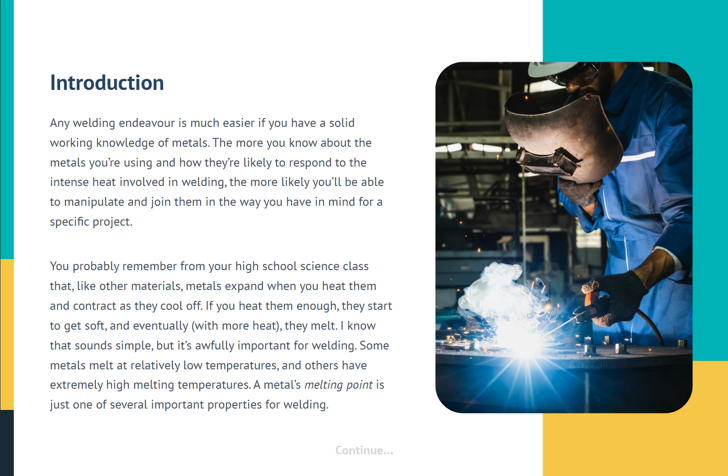Any welding endeavor is much easier if you have a solid working knowledge of metals. The more you know about the metals you're using and how they're likely to respond to the intense heat involved in welding, the more likely you'll be able to manipulate and join them in the way you have in mind for a specific project. You probably remember from high school science class that, like other materials, metals expand when you heat them and contract as they cool off. If you heat them enough, they start to get soft, and eventually, with more heat, they melt. I know that sounds simple, but it's awfully important for welding. Some metals melt at relatively low temperatures, and others have extremely high melting temperatures. A metal's melting point is just one of several important properties for welding.

Here are just a few others to consider. Ductility is a metal's ability to change shape, bend, stretch, and so on, without breaking. Gold has a high level of ductility, while tungsten isn't very ductile at all.

Electrical conductivity is a measure of how well a metal can conduct a current of electricity. Copper conducts electricity really well. By comparison, stainless steel isn't a great conductor of electricity.

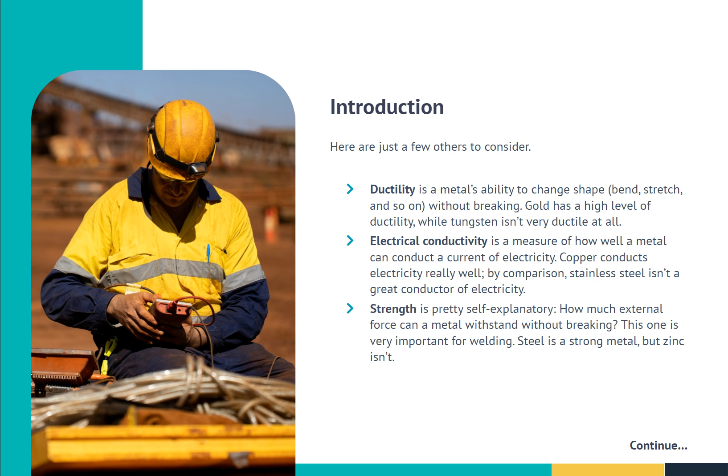Strength is pretty self-explanatory: how much external force can a metal withstand without breaking? This one is very important for welding. Steel is a strong metal, but zinc isn't.

You can read up on many more properties of metal, and the more you know, the more easily you can make smart decisions about how to weld those metals effectively. Not all metals are widely used for welding, of course, and you probably won't work with a huge range of metals in your welding shop until you've been welding for a while. That's completely fine, however, because plenty of exciting welding projects, both fabricating and repairing, involve only a few select metals. See why welding matters earlier in the chapter for more on those divisions.

For example, most of the welding practice exercises I walk you through in this book, as well as the welding projects I detail in Part V, focus on 3 metals: steel, stainless steel, and aluminium. These three are the most commonly used metals for beginning welders, and you should take the time to get to know them. In the following sections, I give you a quick look at each one.

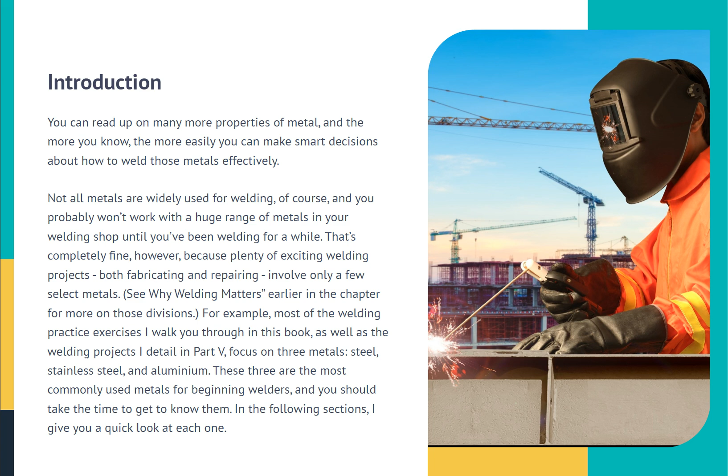Steel is a strong, versatile metal that you use all the time in your welding projects. You may not realize it, but steel is really an alloy made up of iron and less than 2% of another material. Carbon is often used in steel alloys, and you can find three different levels of carbon steel: low, medium, and high carbon steel. The more carbon in the steel, the stronger the alloy is.

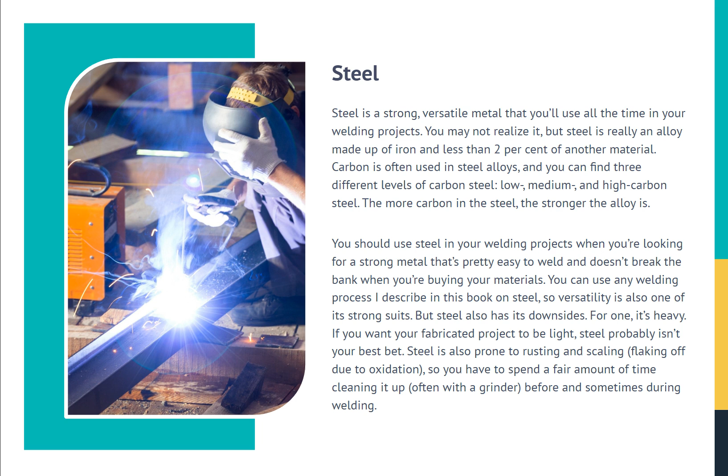You should use steel in your welding projects when you're looking for a strong metal that's pretty easy to weld and doesn't break the bank when you're buying your materials. You can use any welding process I describe in this book on steel, so versatility is also one of its strong suits. But steel also has its downsides. For one, it's heavy. If you want your fabricated project to be light, steel probably isn't your best bet. Steel is also prone to rusting and scaling, flaking off due to oxidation, so you have to spend a fair amount of time cleaning it up, often with a grinder, before and sometimes during welding.

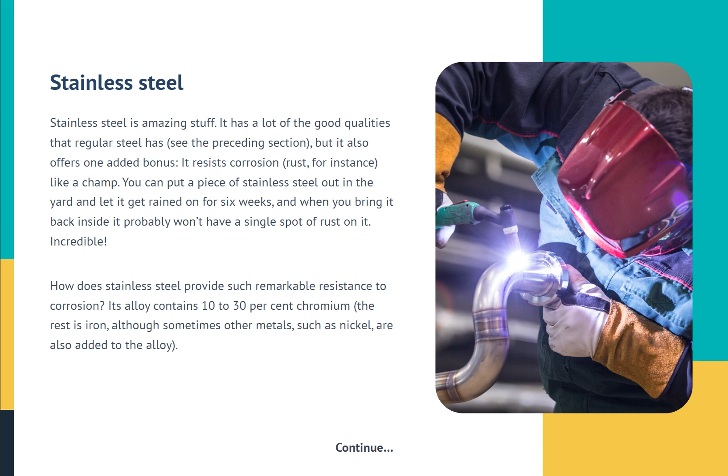Stainless steel is amazing stuff. It has a lot of the good qualities that regular steel has, but it also offers one added bonus: it resists corrosion, rust for instance, like a champ. You can put a piece of stainless steel out in the yard and let it get rained on for six weeks, and when you bring it back inside it probably won't have a single spot of rust on it. Incredible. How does stainless steel provide such remarkable resistance to corrosion? Its alloy contains 10 to 30% chromium, the rest is iron, although sometimes other metals, such as nickel, are also added to the alloy.

You can weld stainless steel with all three of the major types of arc welding: stick, MIG, and TIG. It's a great choice if you want your project to resist rusting or to have hygienic surfaces, those that don't harbor bacteria and other microscopic critters. Stainless steel is pretty expensive compared to other commonly welded metals, so be prepared to open your wallet a little wider if you choose stainless steel for a welding project.

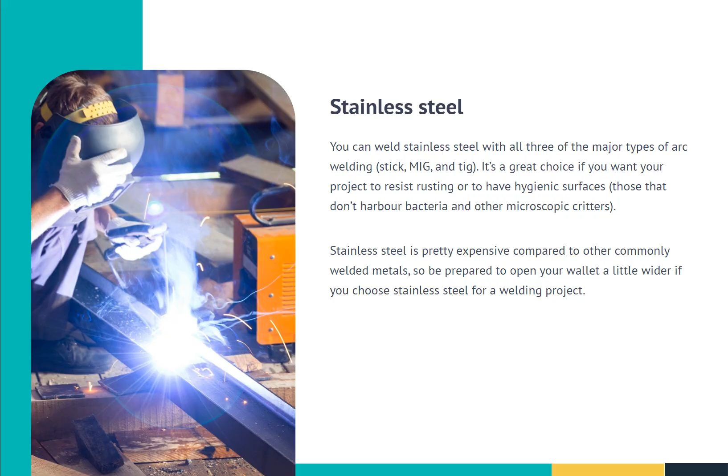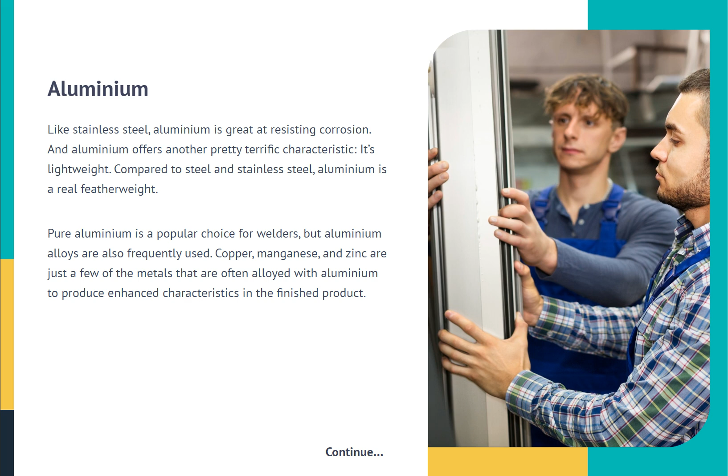Like stainless steel, aluminium is great at resisting corrosion. And aluminium offers another pretty terrific characteristic: it's lightweight. Compared to steel and stainless steel, aluminium is a real featherweight. Pure aluminium is a popular choice for welders, but aluminium alloys are also frequently used. Copper, manganese, and zinc are just a few of the metals that are often alloyed with aluminium to produce enhanced characteristics in the finished product.

If you are going to be welding aluminium, I recommend going with TIG welding. It just makes for a cleaner, easier job. If TIG isn't an option, take MIG welding. You can stick weld aluminium, but it's not ideal. Your choices for stick electrodes are going to be limited, and you are probably going to have a difficult time maintaining the correct arc length.